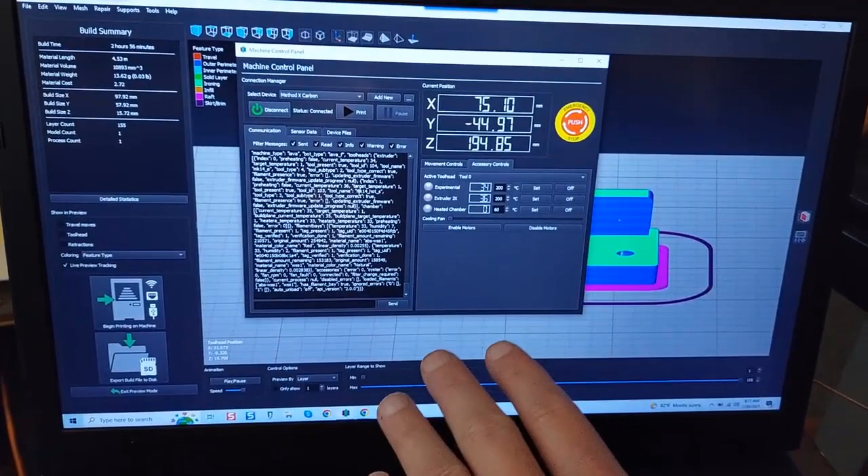I'm working with the Method right here. And I wanted to show you guys I'm working with ABS Rapid Rinse and the Rapid Rinse support, and today I'm going to do a combination print where I'm going to actually print a raft of Rapid Rinse and then work with the ABS Rapid Rinse filament as far as creating a fan bracket.

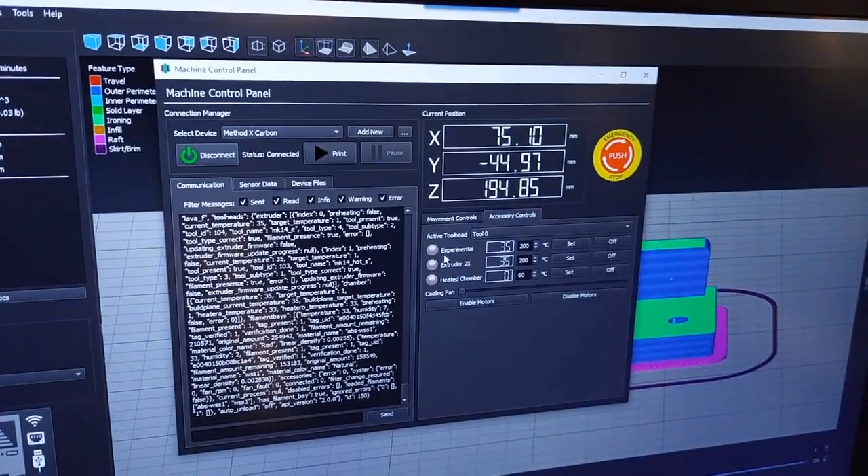But before I do, I wanted to discuss what I found so far working with these filaments. I don't know if this is just routine in the sense everybody's experiencing the same thing, but what I'm experiencing is that the set temperatures by Makerbot are far too high to perform properly. Now, inside of Simplify, you naturally can go in the machine control panel, and you can see here, I've got the experimental extruder and extruder 2XA running for support.

And you can individually set your temperature to whatever you like for a single extruder and test it without actually purging it, meaning you can actually set the temperature, let it come up, and then decide if you want to purge it just to see how that extruder behaves. This is critical when you're doing trial and error to really dial in your temperature.

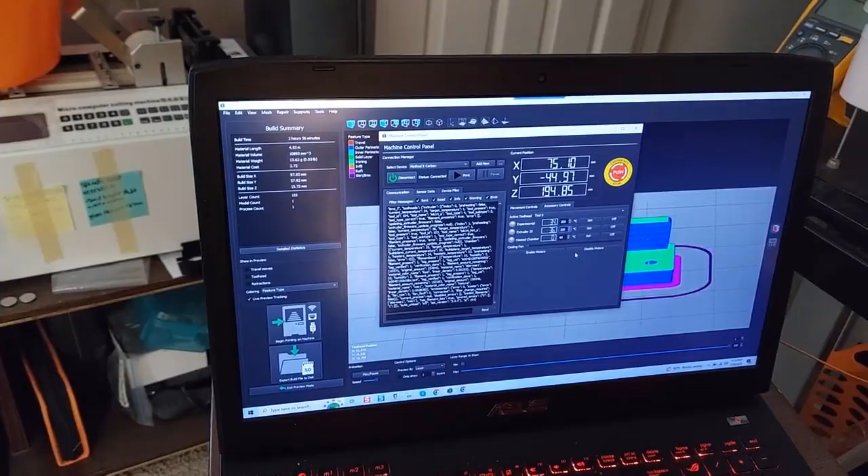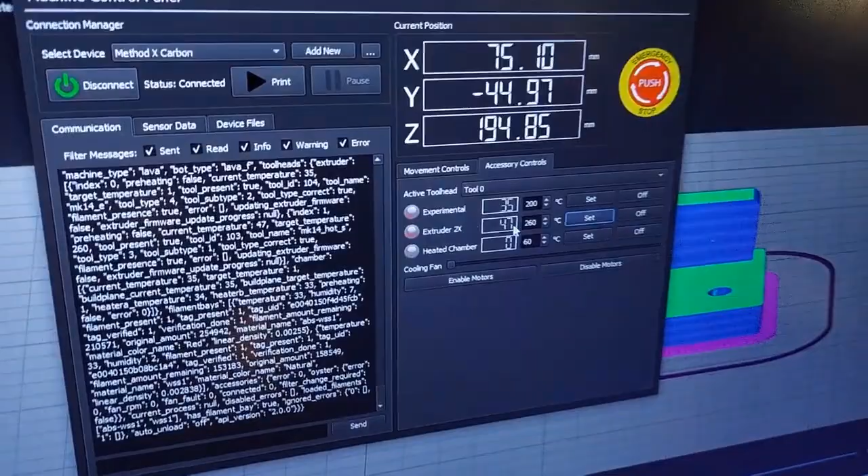So let me show you what happens if I use the stock temperatures, and I'm just hitting off on the experimental extruder and also on the chamber because I don't want to turn those on. And I want to set this, and you're going to see this LED over here start glowing bright red. You see it's starting to climb right now. You see that temperature going up.

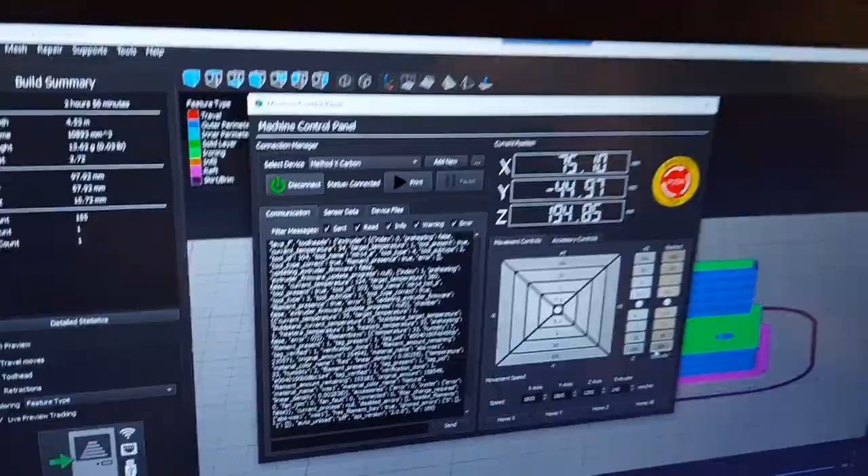And I'm going to select Active Tool, Tool 1, because I want to be able to purge this second extruder, which under Makerbot's terms and under Simplify's terms, 0 is the experimental extruder and 1 signifies the support extruder. So right now, we see our temperature going up on extruder 2, and we're up to 145 and climbing. And I'm going to purge this after it actually hits the temperature to show you how much ooze we're going to get.

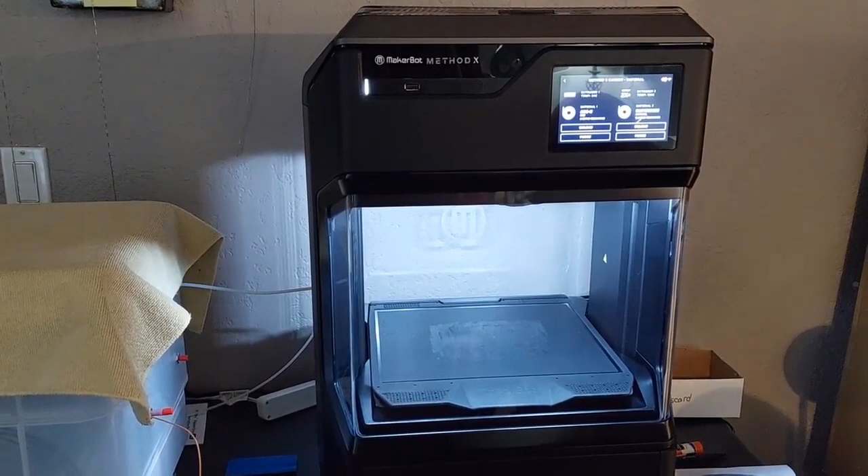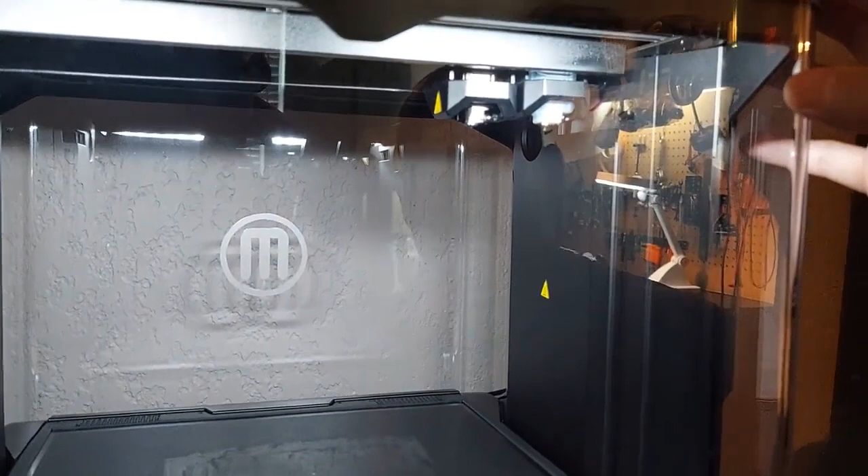And this filament does something else I'm going to highlight and show you guys that you can look for. Because believe me, it's going to save you a lot of filament if you take the time to do what I'm showing you here. We're almost there, we're climbing a little over 200. Now she can focus on the extruder, and you can see we're starting to get a little ooze. It's starting to happen. We're at 238, climbing still.

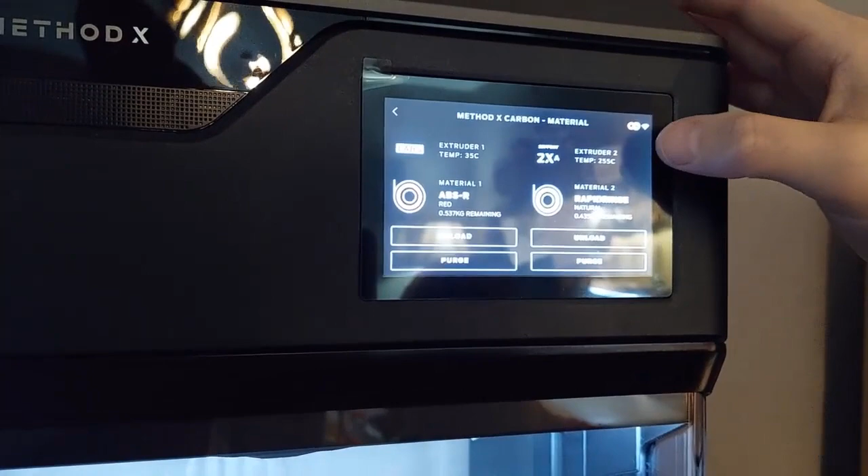Remember, I have not triggered the extruder to purge. It's holding position, and you can see that back pressure from the heat is creating a mass amount of ooze. You can see it coming out. Right now I'm holding a 255, which is correct. I'm at 255 and floating, 254, 255, and you can see the amount of ooze I'm getting.

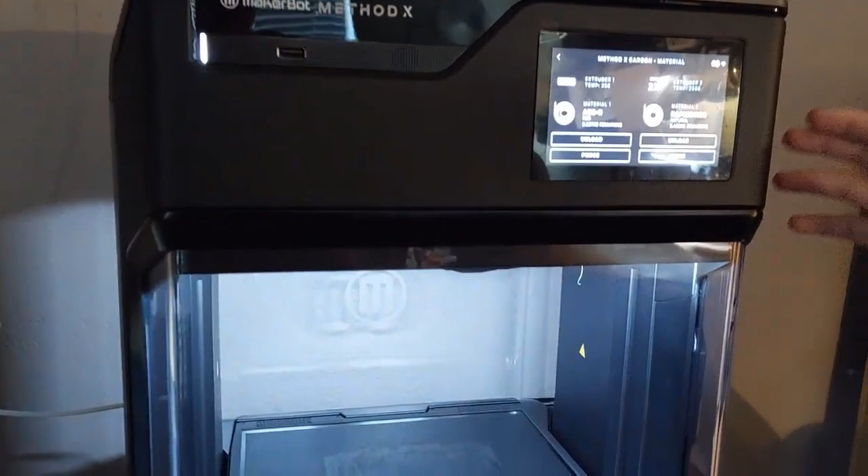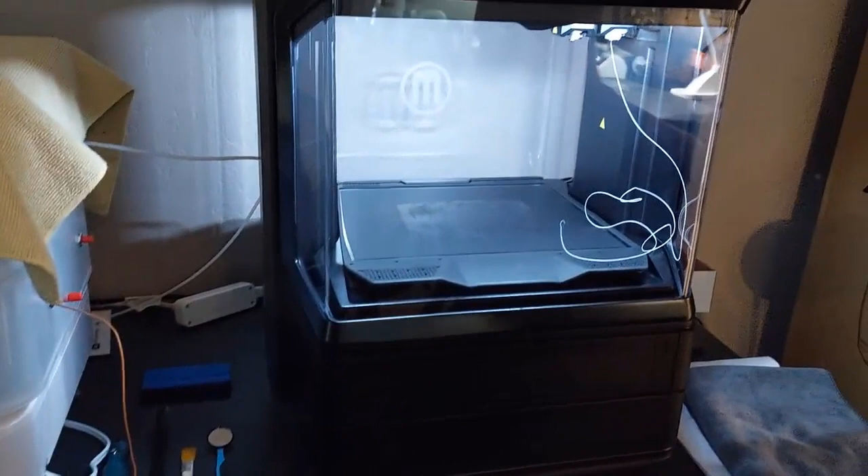So I'm going to purge it now. I'm going to select 100% and watch what happens. It's going to run a full cycle. It's coming out, it's coming out. We'll let it go through a full purge, and then I'm going to cut it off, and we're going to see how long this extruder will run in terms of ooze. Off. Now she can shoot right here, and you'll see the extruder now is cooling off.

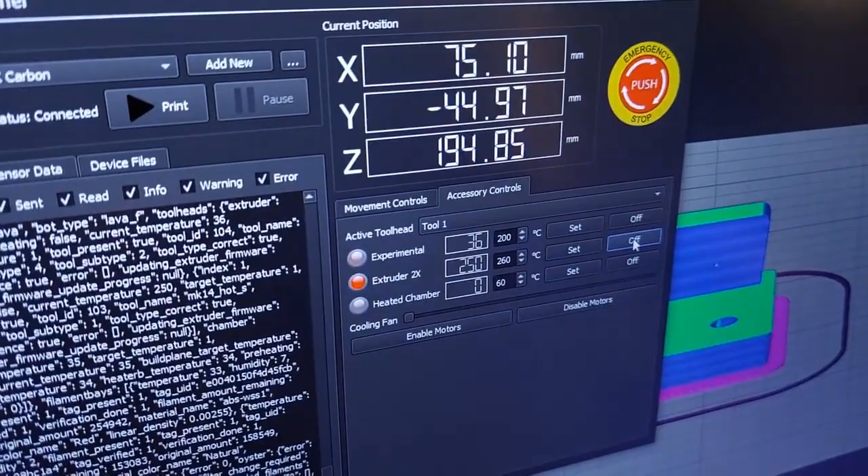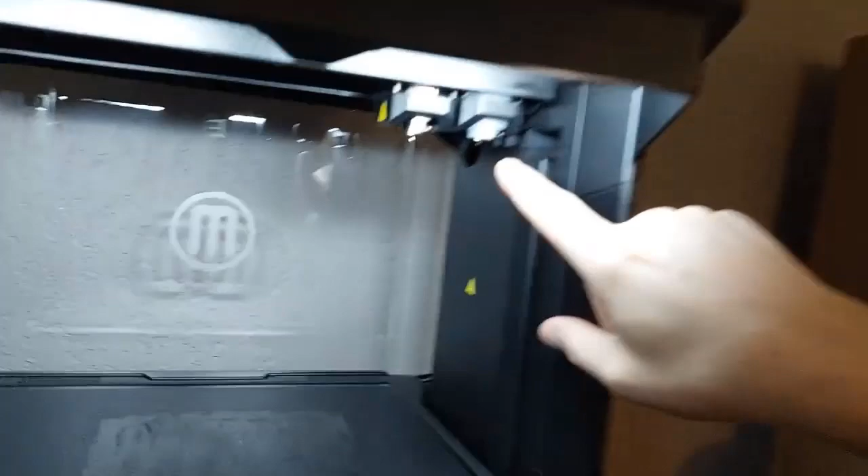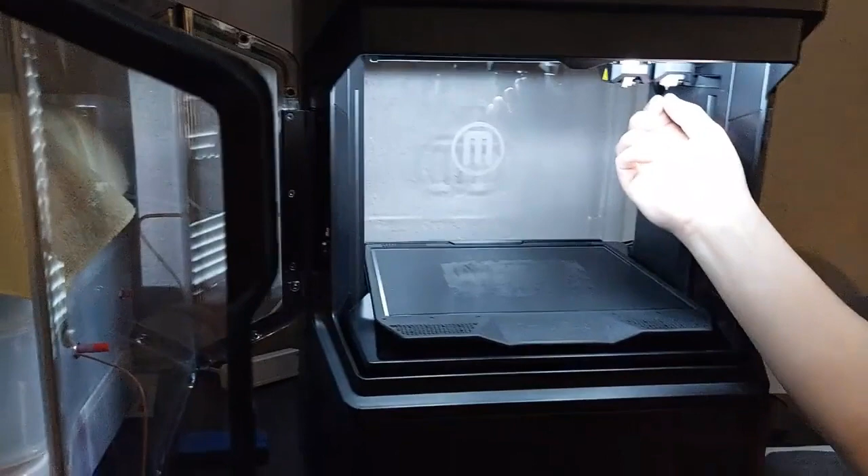Okay, so what I'm going to do is I'm going to just separate this. Boom. And you can see, even if she comes in a little closer, we still have ooze. So if you're doing a combination print, you're going to have problems because that's going to continue to ooze for some time. Then it can also dirty your nozzle, and that takes a long time to correct as well.

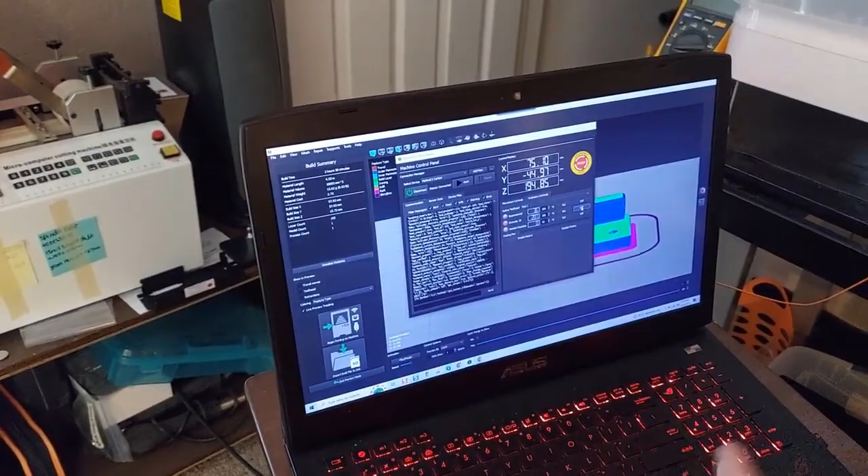So after playing with this for some time, you can see once we hit about 217, everything kind of slows down and stops. Okay? The interesting part about using Simplify, I'd say probably one of the most powerful features of this software, is that we can now do a real-world test, and I'm going to go to my set temperature, which I figured out was at 225.

That's a huge difference, but I want to show you how it behaves. Right now we're cooling, we're at 195. I have my idle temperature set at 170. You can see we're no longer running, we're basically hanging stagnant. We have a slight little piece coming out. You can see right here, just a tiny, maybe a millimeter, teeny bit.

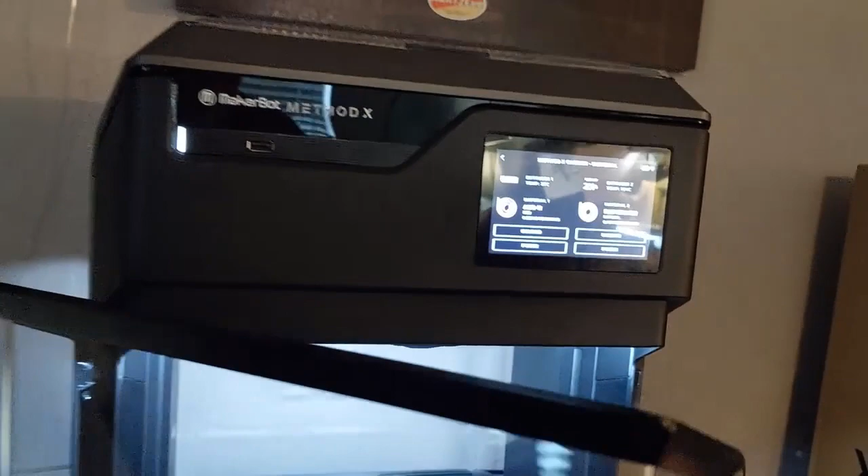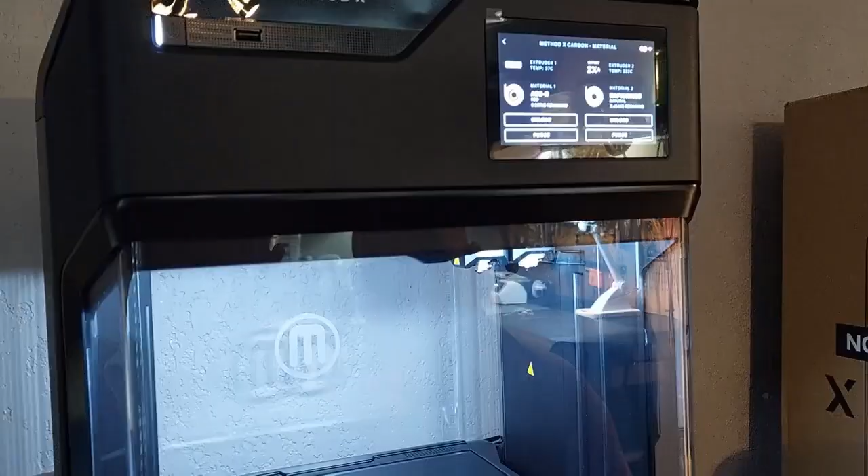And what I'm going to do is I'm going to hit set now, and I've set the temperature to 225. So watch what happens and watch how this filament behaves, as well as the extruder. Hitting it right now, we're coming up to temperature. Okay, I'm at 223. Extruder looks the same, right? Everything on the extruder looks right. I'm going to hit purge.

Okay, did 100% purge. We're at 220. I want you to see how this filament behaves when it stops. We're doing a test similar to PVA, where we're looking for a clean break. When I go to separate this, I want to have a very clean break. I'm just doing 100% purge on Simplify.

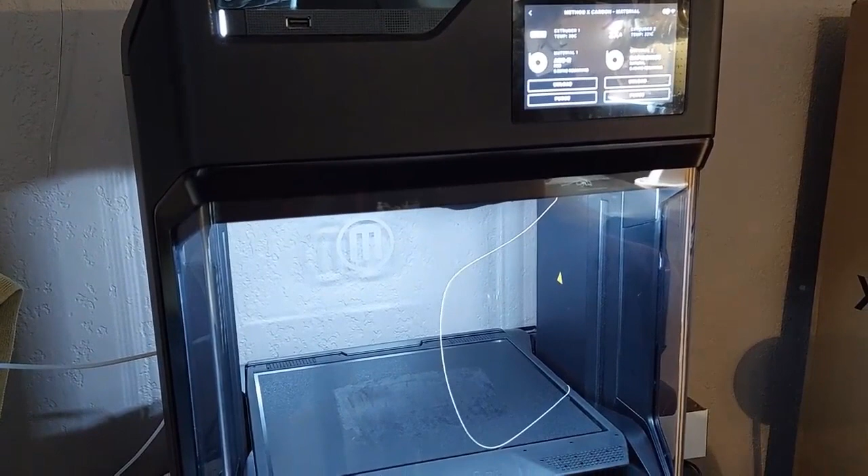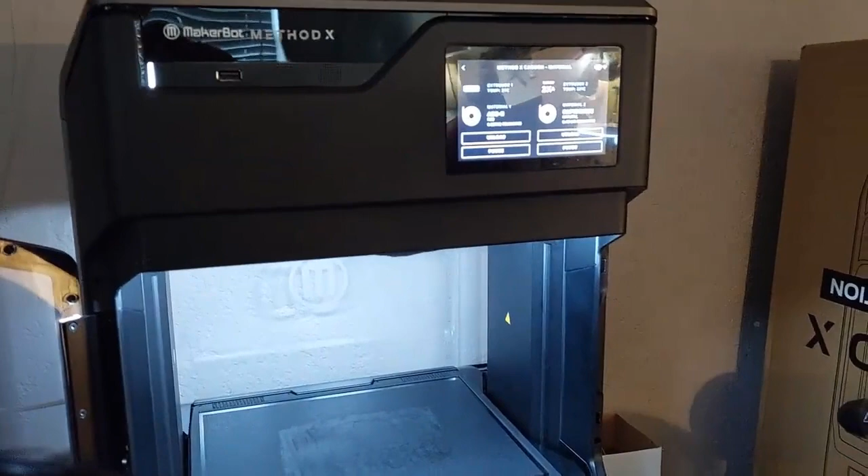It will autonomously stop. And once again, I'm going to pull this, and it's still at the 224 degree temperature. Look at that. You have no run at all. And it's still holding 222. We have not triggered another purge, and it's still holding at 221. Doing it again. There we go.

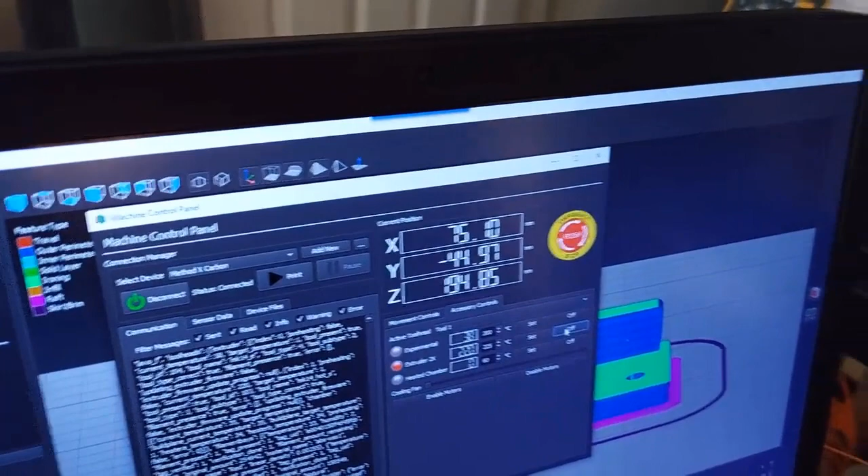I'm going to turn off the extruder as soon as it stops purging. Done. Extruder is off. It's cooling down now, so you can see it right here. And it will be going down. There it is at 219, 218, 217, and watch this. As soon as we pull this, complete clean separation. You have no ooze whatsoever.

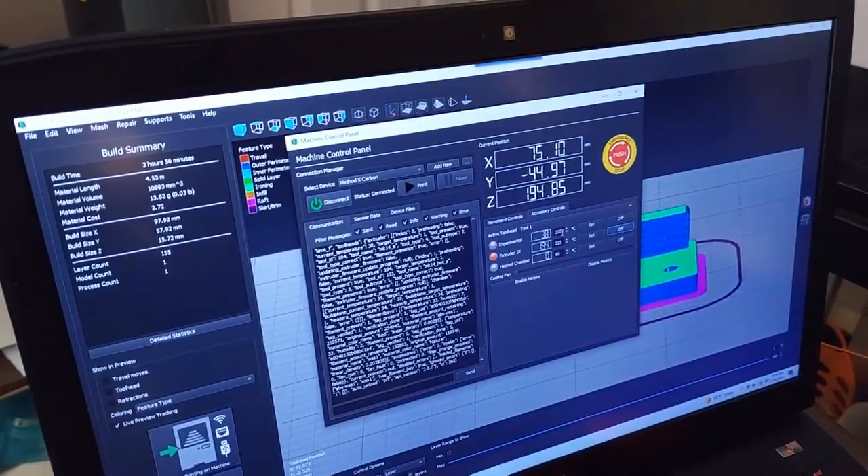Now, you're probably asking, did I also experience this same ooze problem and over temperature setting with ABS? And I did. So let me show you what I set with ABS. Once again, I'm going to select off. ABS now, we'll come over to the experimental extruder. Here's the temperature that they recommend, 260. Okay? And we're going to select these off, and set. This is ABS now, we're climbing. Here we go. You can see our extruder slowly climbing, and we're cooling down on extruder 2.

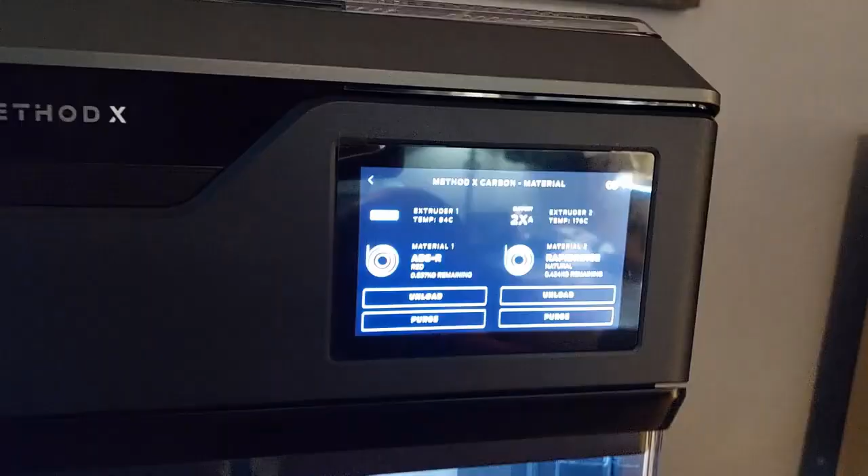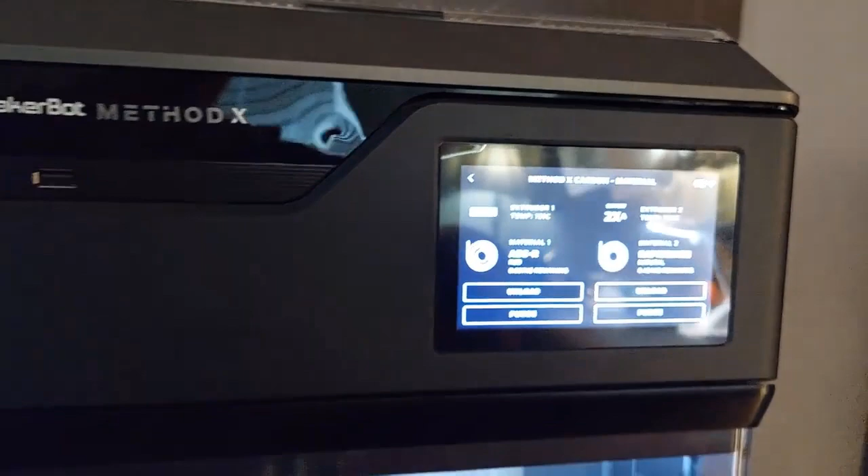Now I can honestly say doing these tests are imperative for you to really dial in your temperature, and Simplify3D makes it super simple. I'm hoping to see features like this added to Cloud Print, because it will definitely let you dial in your temperatures much easier. You can see that extruder 2 is perfect. It's extremely clean, and we have no problem with, once again, going with the combination print.

Many of you already realize the key to combination printing is assuring that you have no ooze on either nozzle, and you have to enable as many features as possible to make sure of that. If you do have ooze, a successful print is still possible, but naturally the more ooze you have, it's going to corrupt that print. And when you're doing prints like I'm doing that are made for resale, a non-perfect print I do not present to my clients. That's my own preference.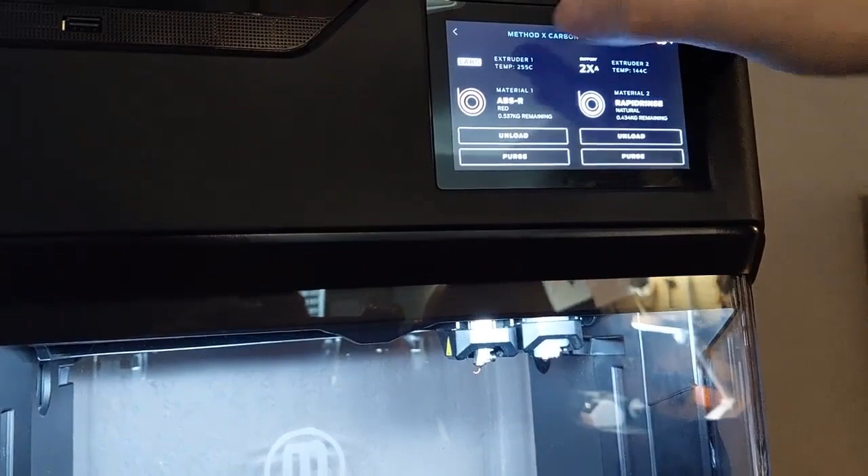I've seen many people do different things, and you can see that ABS is at 248 now, and it's starting to ooze. And you can see that right there. Once again, I'm holding temperature. I'm not purging. I'm watching to see what kind of ooze pattern I have at 255, 256, and you can see we're still oozing. So now if I hit purge, I'm going to switch over to tool 0 because that's experimental, and I'm going to purge. Of course, it runs like water, and as soon as this stops, I will stop the extruder from heating, and then we'll reset it to the temperature I've set so we can prevent ooze.

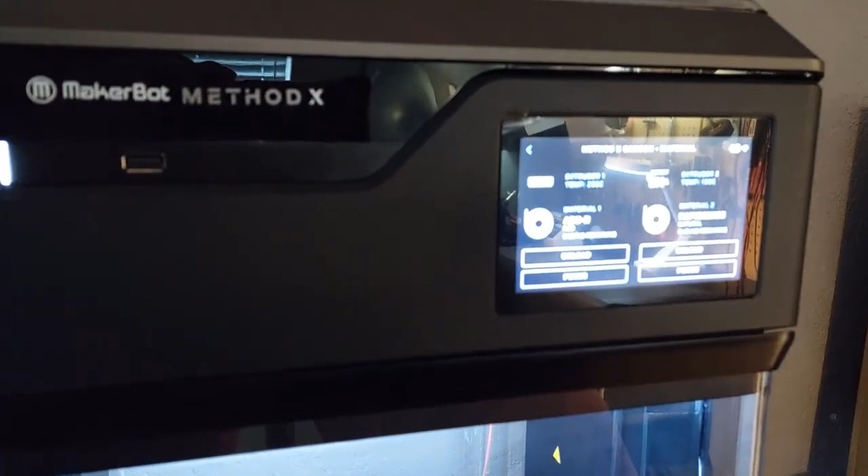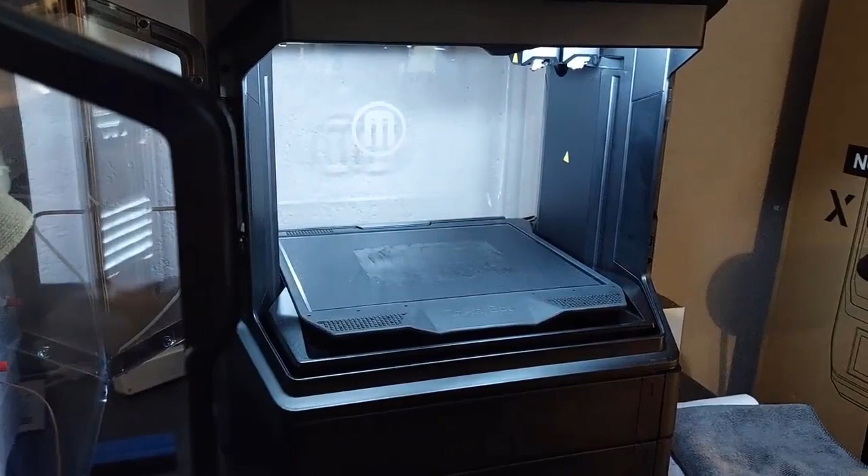Once again, purging at 255. Even though the temperature said 260, temperature's going down now. We should see it dropping. 252. And now what I'm going to do is I'm going to just show you what happens. There it goes. It's still oozing. As that temperature is falling, it is still oozing. You can see it.

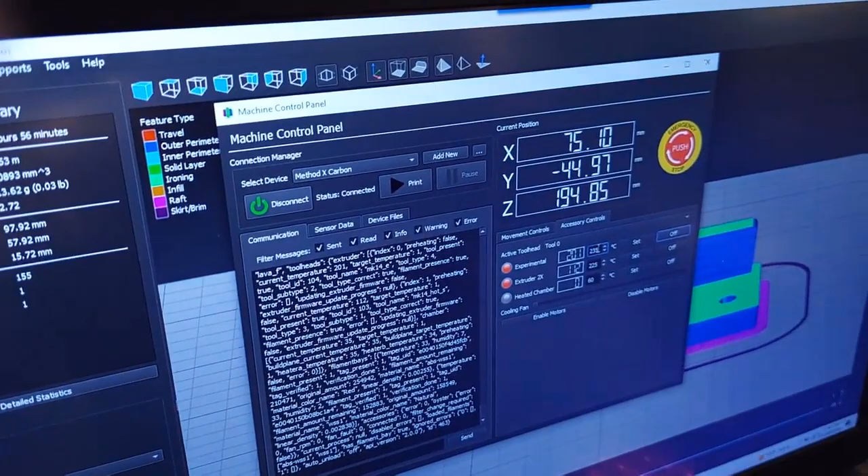Now what we're going to do is I'm going to show you what temperature I set and the performance you'll get once again. Come over here. I'll set this extruder to 235. And again, we'll select off on our extruder 2XA, and we'll select off on the heated chamber just to make sure nothing's engaged. I'm going to hit set. We're going to run this again. It's climbing right now. We'll hit this temperature, and once again we'll hold at this temperature, and I want to show you what you see in terms of ooze.

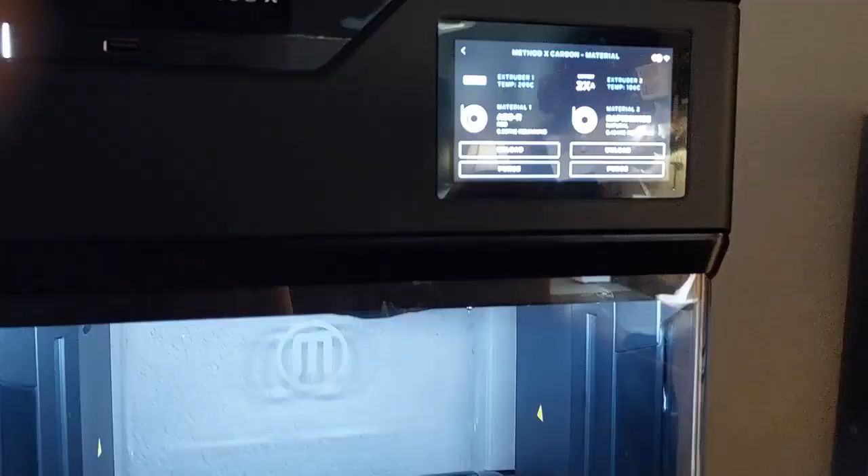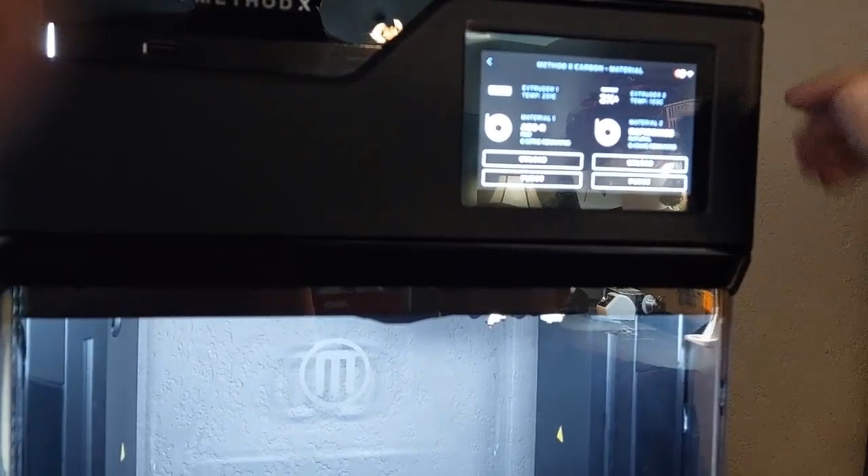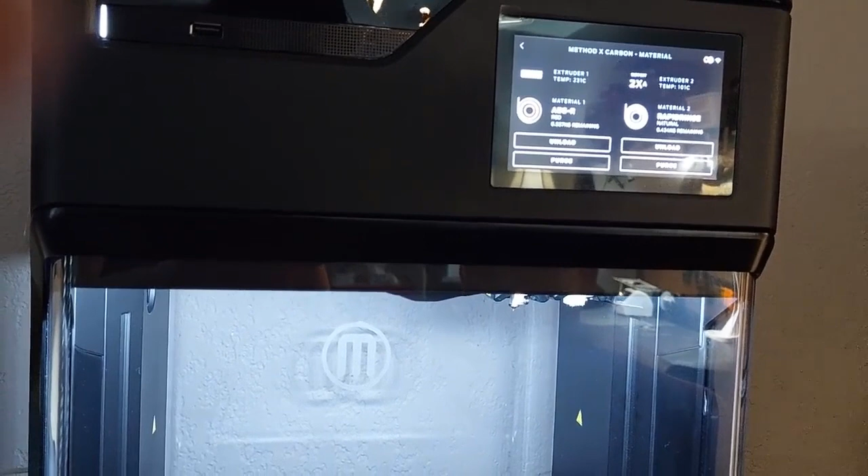Because the one thing you'll notice when you set your extruders this way, you'll find that your oozing pattern, when you're holding at a holding temperature, you should have that same pressure simulated as if you're printing and see the ooze. If you don't see ooze, you've pretty much nailed it. The question is then strength of the print, and I know that will come up also. And I can assure you, I've already printed with ABS at this temperature, and the strength is amazing. So, again, we'll see exactly what's going on.

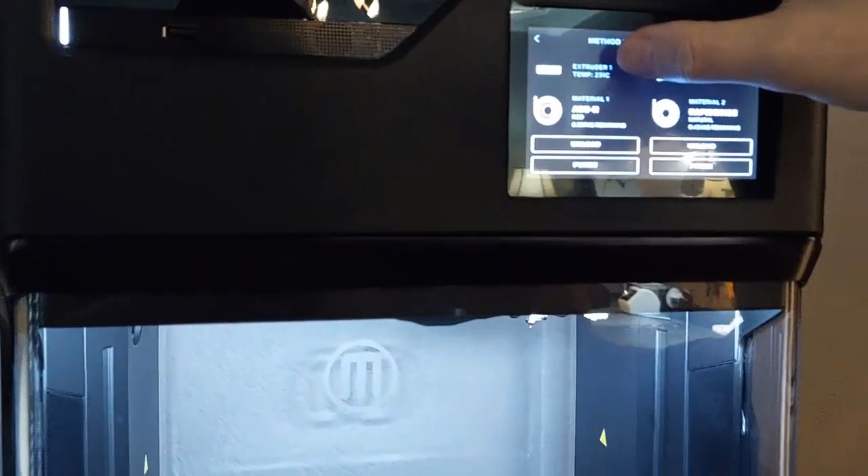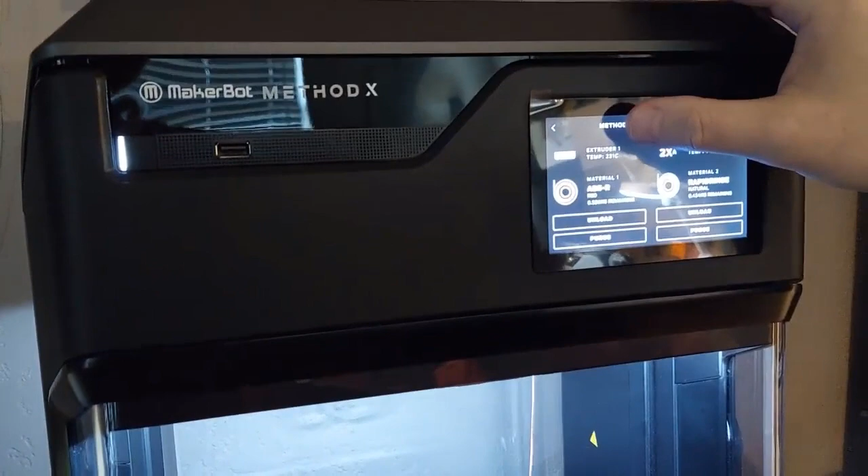We're at 230, and you can see we're at 231 and holding, and look. You can look there at the nozzle, and it's doing nothing. Now I'm going to purge the nozzle. Done? And I'm going to let it go through, and you'll see exactly what I'm saying. We're purging right now at 231, which is really set at 235. Once again, I usually have a 3 to 4 degree differential.

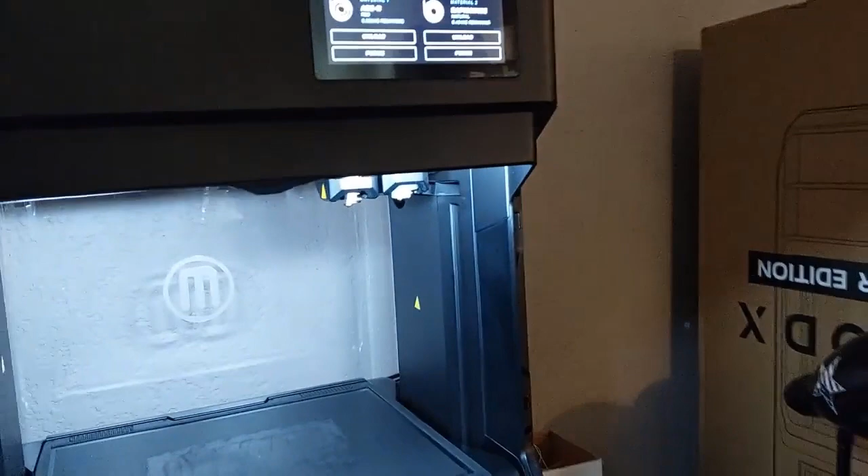I'm going to let it continue, and I'm going to pull this piece of filament off as it stops, but leave the temperature where it is to see if we have ooze, similar to when it would stop printing and simulating, you know, naturally changing over. Okay, here we go. We're looking good, guys. Immaculate. Now let me show you. I'm going to purge again. Got a teeny drop forming, and we're going to go boom, right out.

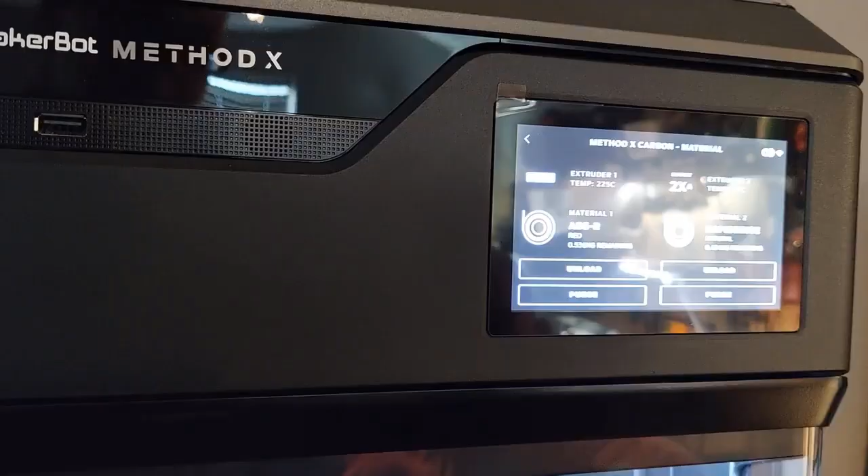Now what I'm going to do is turn the extruder off once it's done purging, and then we can see if we have any ooze, because naturally you would not leave an extruder in a heated state without purging it. So we'll see what happens when we drop temperature. Done. Temperature is now off as far as the extruder. We'll be dropping. And we can see exactly what's going to happen here. We're at 221, dropping now, 219, 217. Let's see what happens.

Take that camera, show you exactly what we got. We have immaculate, gentlemen. And that's exactly what we want right there. Question is, like I said, if your strength is going to be there, even though we've adjusted the temperature to the settings that we went, because they are far beneath what the manufacturer recommends. Well, we'll do a test now and see exactly what we get.

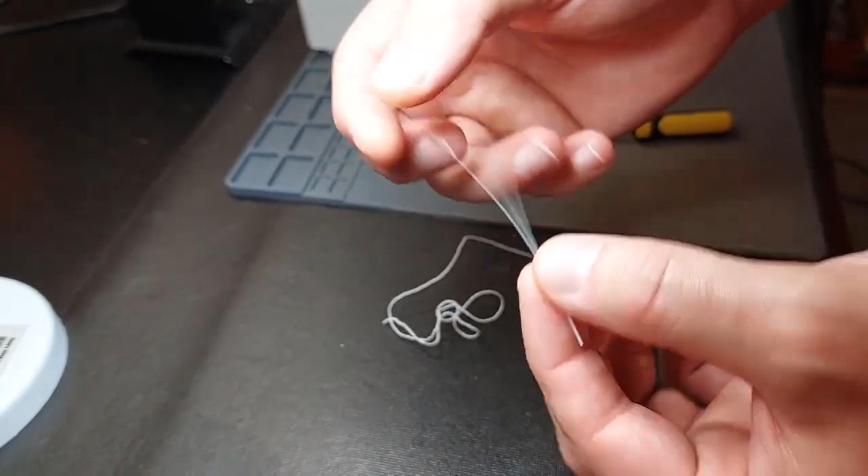Okay guys, I wanted to show you what the RapidRinse support should look like. When you purge that extruder, you should see and feel a perfectly smooth line of filament. Okay, this strand right here is perfect. If you overheat after it's been sitting in the chamber for a while and go to purge, you're going to find that you will get a very thick, rough piece of filament. And I'm sure you can see that.

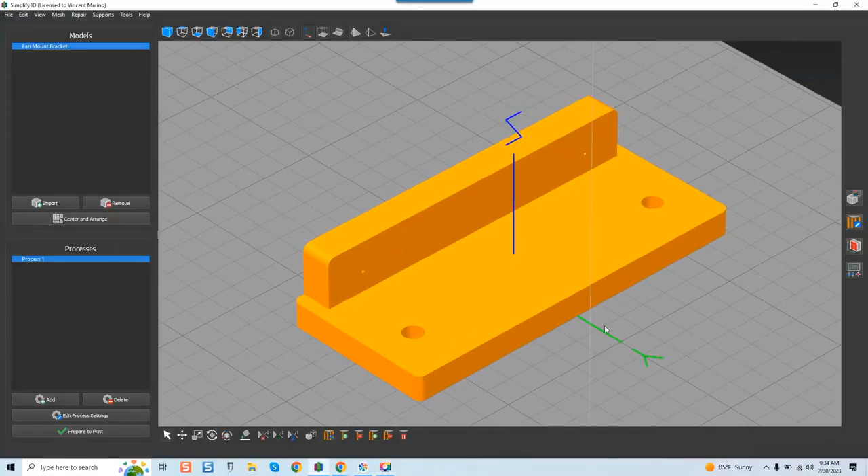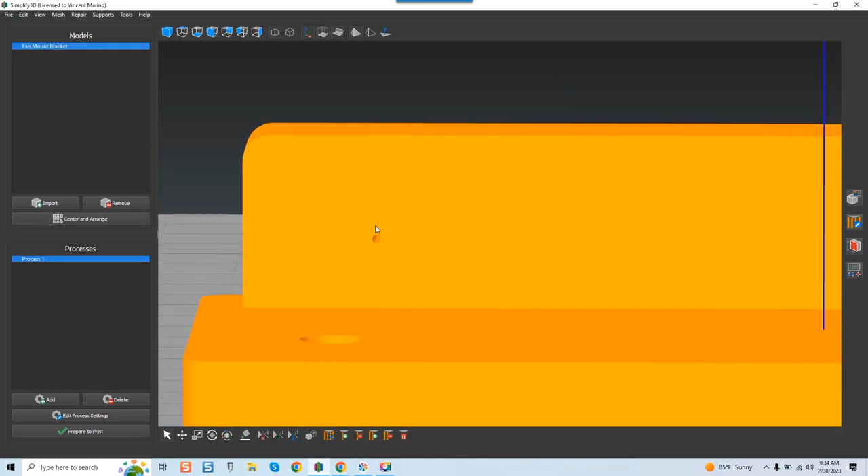Okay guys, I'm inside of Simplify, and you can see I've got the fan bracket now on the build plate. And one thing I want to point out, you can see that there are some light areas, and if we look close, those are 0.5 millimeter holes. Now why I did that is so that naturally it's much easier to print than to print all kinds of fill inside of there and try to get a perfectly symmetrical hole. I'll naturally just leave these to mark that area where I want to drill, and therefore it'll give me an alignment tool and I can get a perfect hole when it's all done.

So now that you see exactly what we're working with, I'm going to go in real quick and show you how I set up all of the settings here. And you can see that when we come over to layer, I really haven't messed with anything here. First layer height is at 105%. First layer print speed is at 10%. Everything here is pretty much left alone. I am going with a layer height of 0.1 millimeter.

And then as we come over to speeds, I know that's a question that comes up a lot. Default printing speed, I've already set mine at 2,500 millimeters a minute. Everybody's print speed is going to be different as your own preference. This really works really well. I feel that the printer really is optimized at that for what I'm doing. Again, looking at high-end user prints. So again, XY travel speed is at 3,700 millimeters a minute. And again, that's just rapid motion.

Coming over here to additions, we are, of course, using a raft, and I'll be printing that with the Extruder 2XA. That'll be all set, and above raft speed will be at 30%, which has not been manipulated. Everything there looks good. Temperature, again, experimental.

First layer in Simplify does not auto adjust in terms of leaving the extruder in an idle position. Therefore, you must isolate the temperature at 170 degrees so that you're not going to have purge as you're printing. So again, at least until it comes up to layer 6 on this print. So if you do not do this manually, then you will have issues when you go to print.

I know a lot of end users don't really look at that when printing with the Method because they become used to Cloud Print and how it's set up, where naturally one extruder that's not printing is in idle mode, and therefore it's not going to extrude because the temperature is set so low. That is not the case with Simplify. So again, first layer is at 170. The sixth layer is when we're going to actually see the experimental extruder printing ABS over the raft.

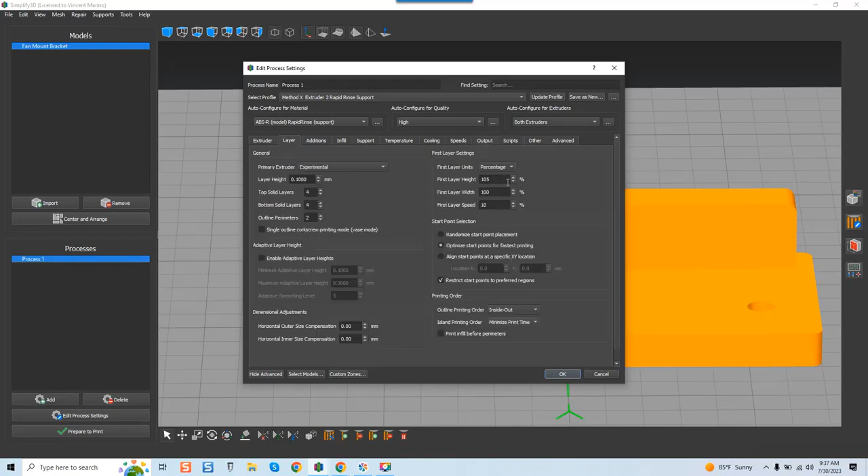The rest of the settings as far as output, I did adjust my Z-axis by negative 0.02 millimeters, so very, very small, in conjunction with, once again, working with that first layer print height at 105%, so it works synergistically to give us more bonding strength so that we're not going to have warpage. Of course, as far as my heated chamber, I have that set at stock temperature, 100 degrees Celsius. So it is definitely heating that filament. And we're going to go from here.

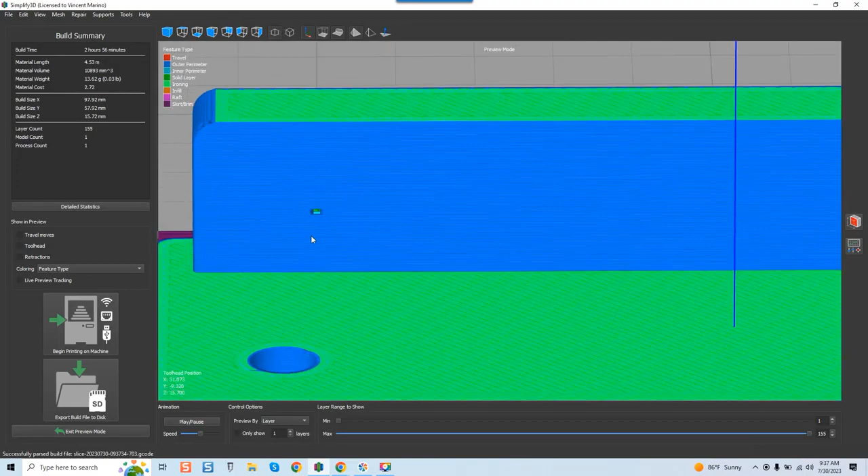We'll go over to prepare to print. And you can see once again where those little holes are, and believe you me, this printer will print those little spots so that we can naturally use them marking where we're going to actually drill. There's your raft. Everything looks good. We're going to turn on live preview tracking,

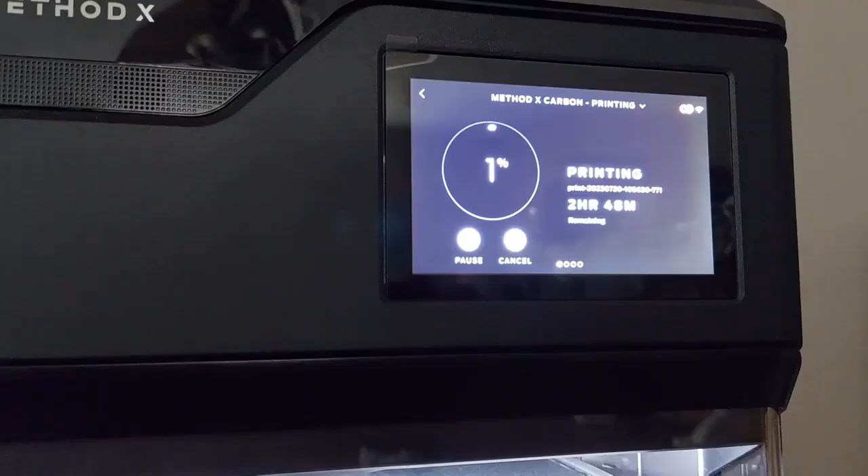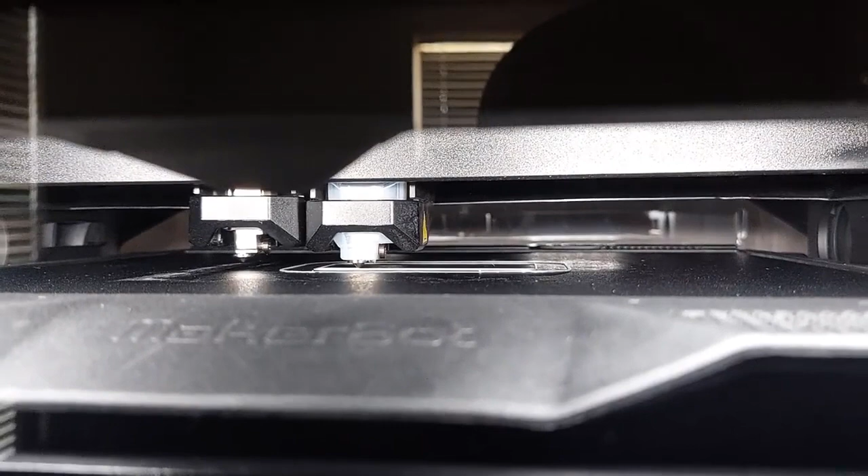and we're all set. Okay, we are at 1%, and you guys can see we are laying down a very nice raft. See if I can focus. See if my hand will help. Now again, I am running a 10% print layer speed, and we're getting a very, very nice first layer. Now guys, I highly recommend you go very slow when you're printing your first layer. You can get virtually any filament to stick the slower we go. Let this finish up doing the raft, and then we'll continue.

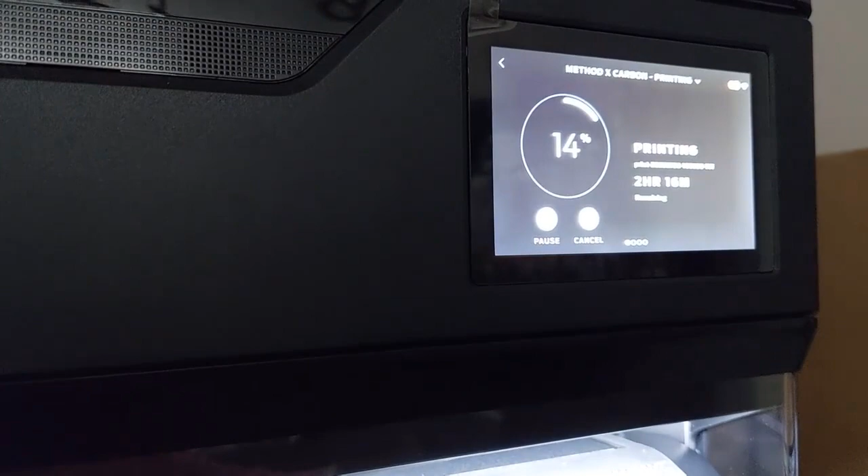Okay guys, now we're at 14%, and we had a slight collision with our brim. And you can see what it did. It just shifted it on the opposite edge. And we really just got a slight little deflection off the build plate. Nothing really to be concerned about.

Everything here looks good. If, however, something like that happens to you and it gets in the way, naturally just hit pause, cut a piece of it off carefully using your flush cutters, and continue. You can see what we've got here, and you see what I mean? It's just slightly off the build plate, and it happened when the nozzles went to do a wipe.

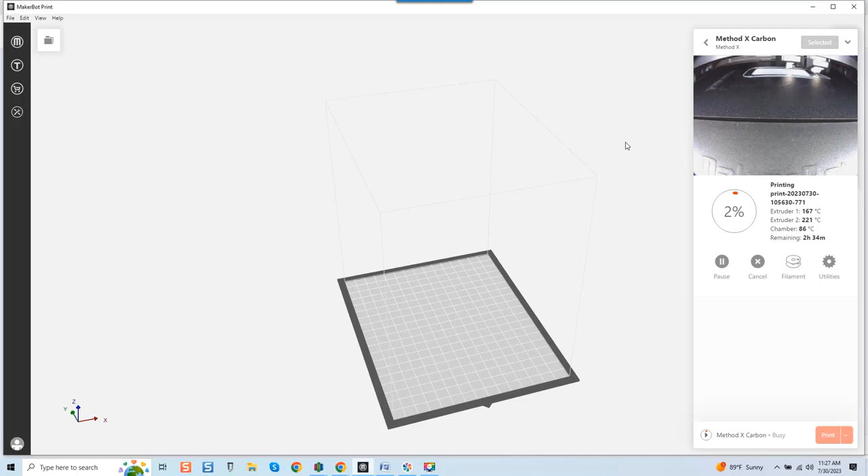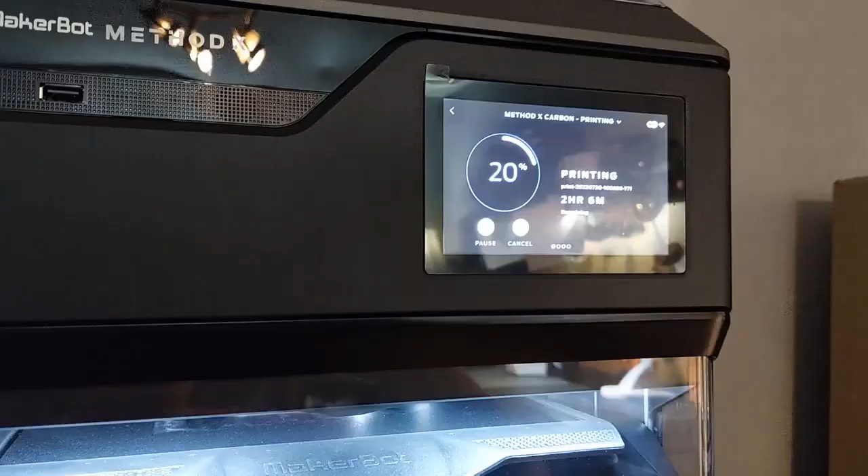Nothing is perfect, and of course, things always can happen. The main thing is the print, and it did not affect the raft at all, and the ABS is coming out beautiful. 20% now, and you can see I had to remove a tiny piece of that part of the brim that came up. Did it very carefully with the flush cutters so it wouldn't interfere with Extruder 2 or doing the print around the part. And you can see we have a beautiful part coming out here.

Guys, one thing I want to point out, and something that's not really looked at, if you can master the art of hitting pause, and what I mean by that is using it in a way that you have all of your settings correctly set for your extruders in the sense of the temperature mainly, ooze settings. You could actually pause the print and save many prints if you ever have an issue. This is something I've never really seen discussed, but something to really think about.

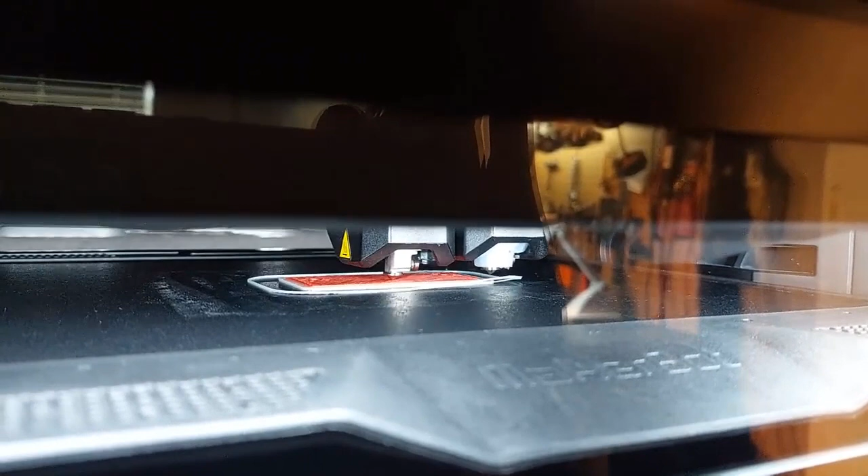In this instance, that part of the brim that came off, it's very minor. Could have been a real catastrophe had I not paid attention to it. I think a lot of guys like to set it and forget it type of thing, and you really got to work really hard to get to that level, and if you put the time in, you'll certainly get there. This was one of those freak instances that just occurred, and something that we try to correct, and best of all, if we can get the print to keep going and still get a perfect print, more power to us.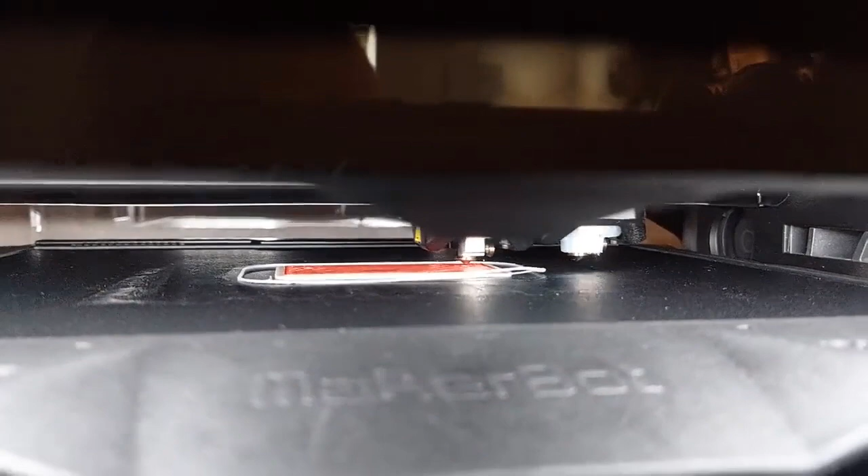43% now, and you can see we are making excellent progress. I really feel that 2,500 millimeters a minute print speed really is optimal. And now we can really see it taking form, guys.

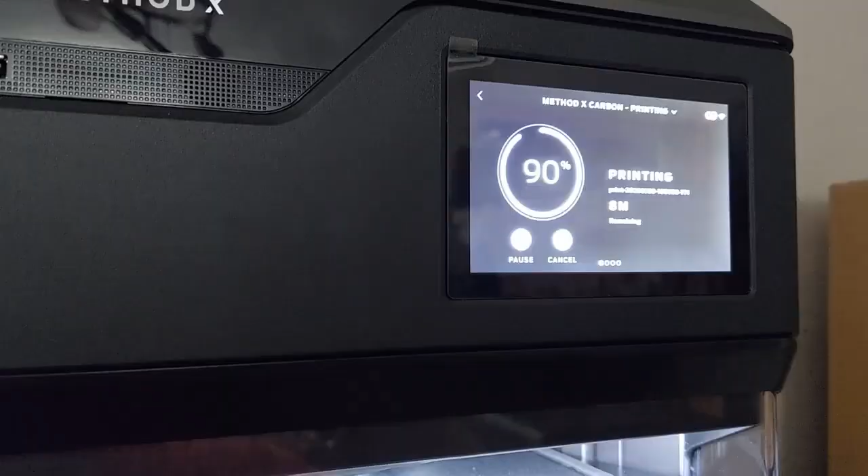90% now, and let's see if we can actually see this. You can see the 1/2 millimeter holes that it printed. See if I can angle this up just to give you an idea. And you can see how clean that is, guys.

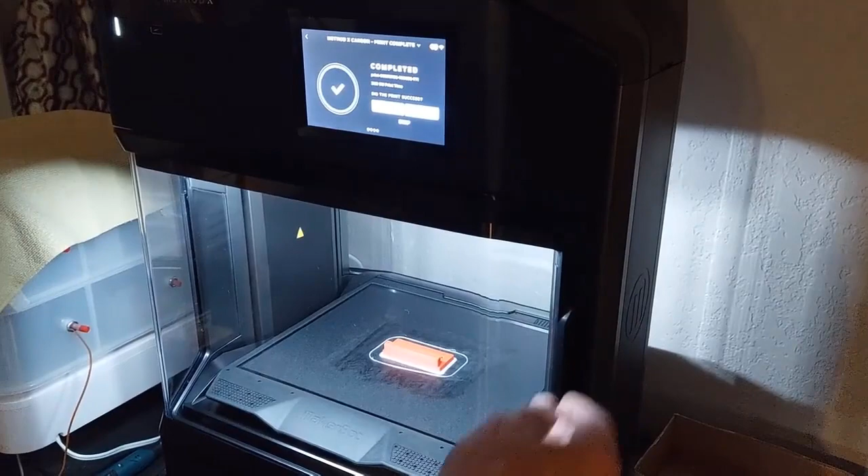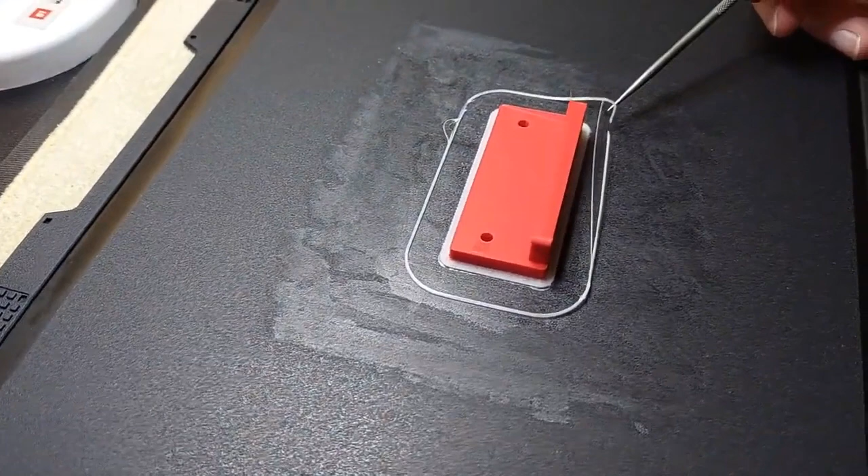Okay guys, the print is done and we're going to take a peek at it. Okay, so you can see where the brim lifted up. Thank God it didn't interfere with the print. Like I said, as long as you master pausing the print and carefully snipping it, you're good if that ever happens to you. Okay, you can see what we've got here with the raft. Part looks great. And this is an area where I want you guys to look at.

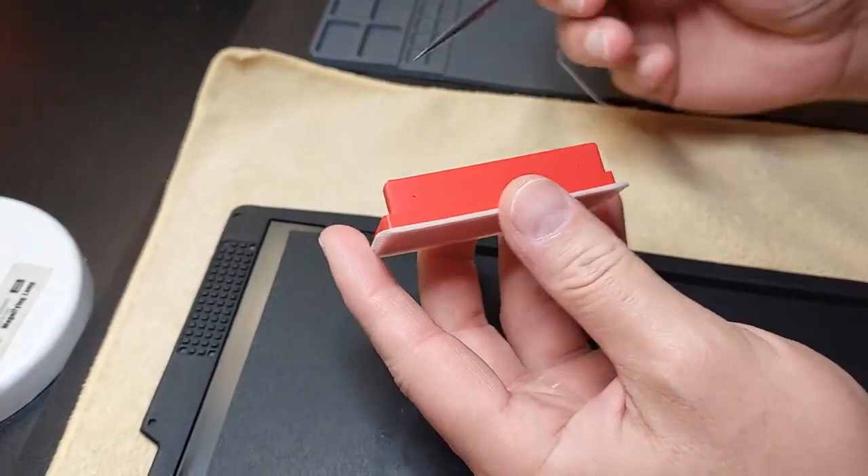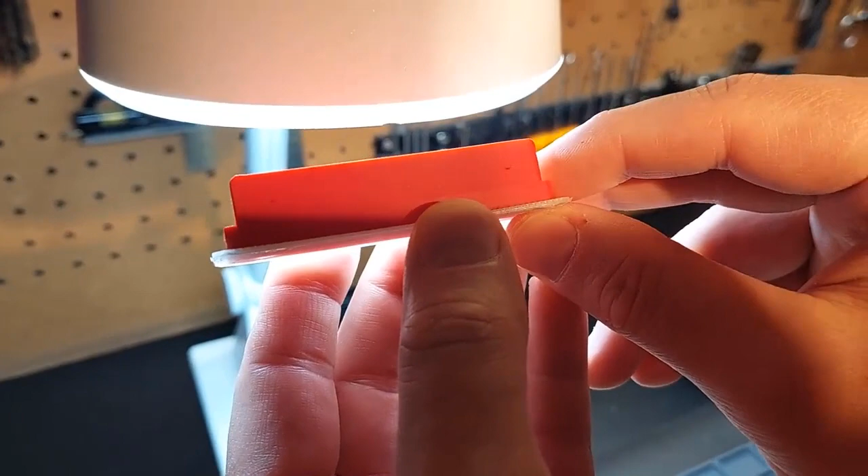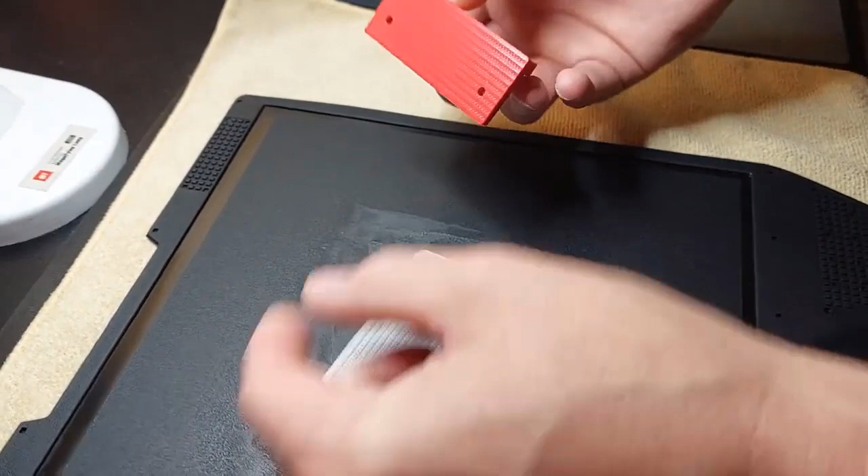Those are 1/2 millimeter holes. And if we look into light, you can actually see through them. See if you can. That one you can definitely see through. Right there. Right there. So that just shows you how accurate this printer is. And you can see the raft removed like nothing. I didn't even need to dissolve this. Fan bracket came out great.

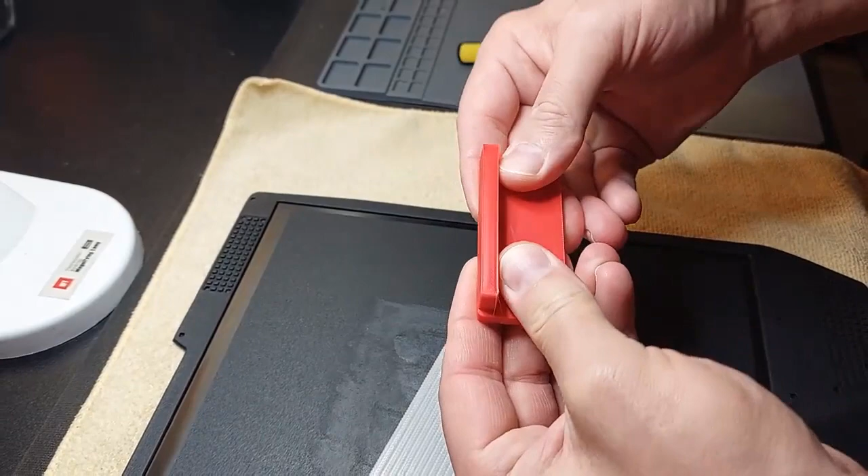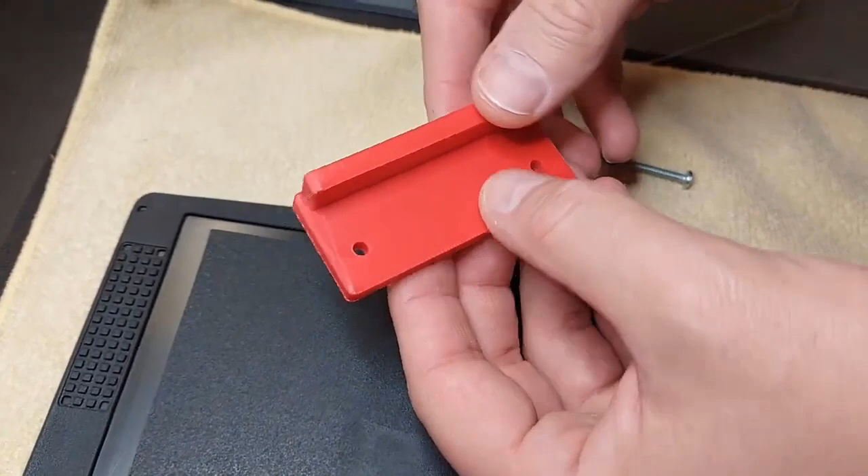Finish is excellent. Got a little texture on the bottom. Check the holes. Right through. Perfect. So now all I've got to do is drill these out and this will be perfect. But you can see with the ironing effect what you get, how smooth. I mean, it's amazing. And the part's like iron.